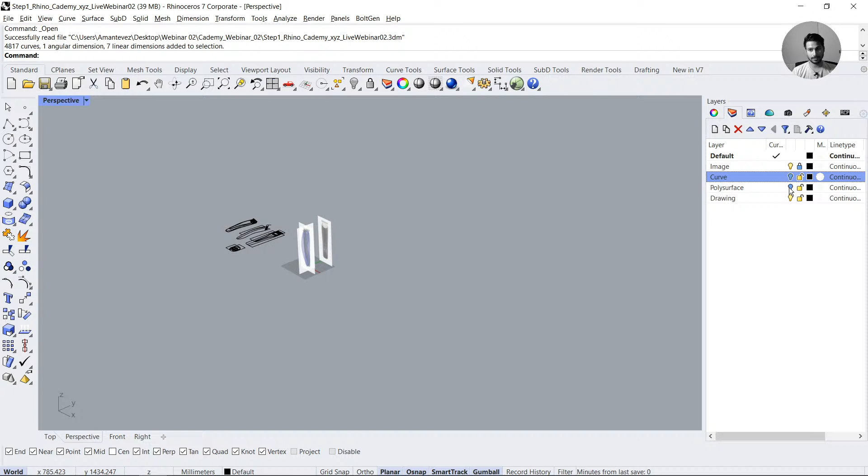So you will see that there is this generic technical drawing of the trimmer. And if you go to the perspective view, you will also see that I have set up the images so that we can trace the shape and create the geometry. You will also see that in the layers tab, I have added the different steps, so you still have the curves and all the steps that we will follow along, just for reference. But let's try to do it on our own without the help of the reference shapes, though we will sometimes turn it on and off to understand what is happening. So the first step is going to be creating the curve of the shape.

I'm going to go to the front viewport, and here you can see that we have the profile. So I'm going to create a new layer called trimmer profile, and you can double click to activate that layer.

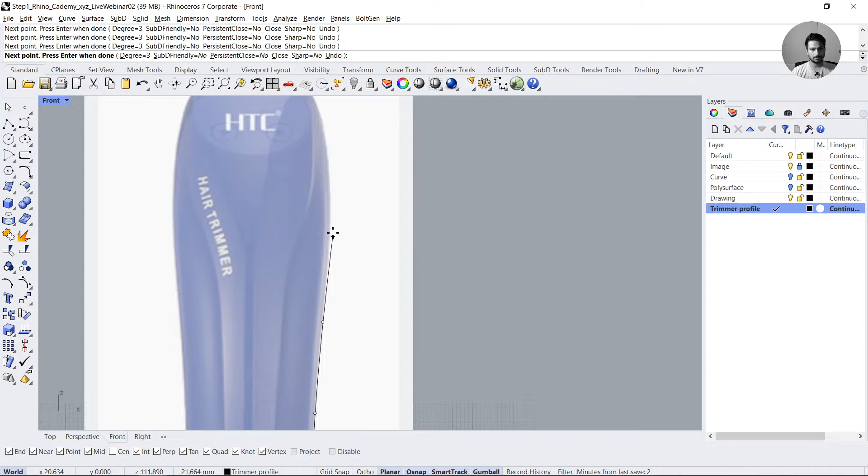So we will start to draw the profile using control points. Let's turn on this command. The degree is set to 3. So let's start by creating the first point in the center of Rhino. You can do that by pressing 0, and you can see that my initial point is snapped to 0, 0, 0 of Rhino. Just try to trace out the shape. Let's add more control points, and just try to extend the curve a bit away from the geometry. We only have to worry about this half, because the other half is just the symmetry of this half.

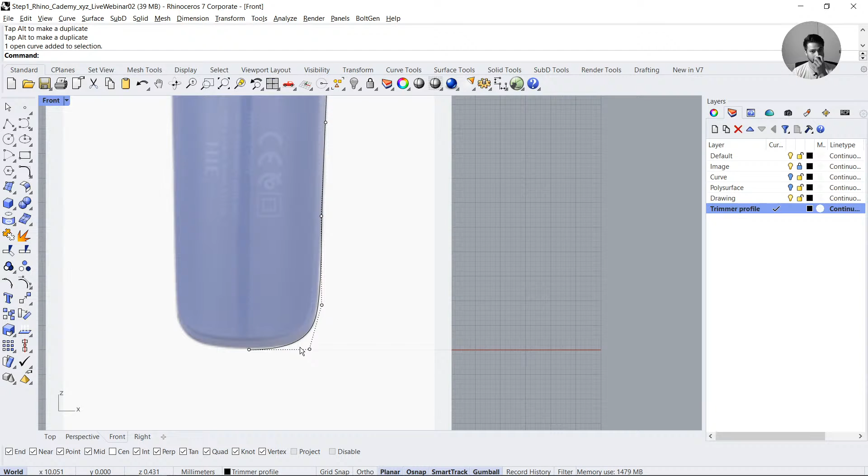Once you have the curves set up, we will now manually calibrate the curve. You can select the curve, turn on the control points, and then move these points in order to put the curve in appropriate positions. So we have a generic outline of the trimmer. We will see how positioning these points affects our geometry once we have created the other parts, but for now let's leave it like this. I hope you guys are following along so far. If you have any questions, just drop them in the chat and I can try to revisit your doubts here.

So once we have the curves set up from the front view, let's move to the right view. For the right view, just go to the right viewport, and now you just have to adapt this curve so that it follows the shape of the trimmer. I will not be touching the last two points, so I will just try to adapt the rest of the points to the shape of the trimmer.

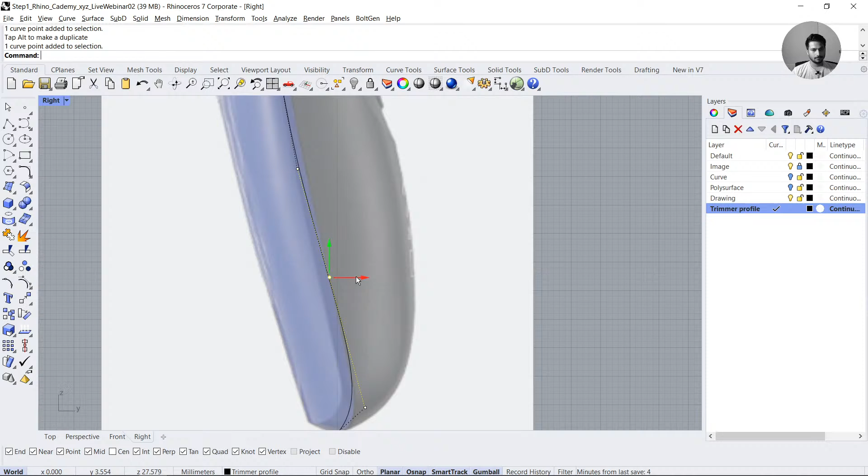When you're working with control points, everything is not so easily predictable, so generally I will position all the points more or less, and then slowly calibrate it. Let's move this control point, somewhere around there. And finally we have it. Again, if you're having difficulties, just try along with me.

If not, you always have the curve layer where you can extract the original curves. So once we have the side profile set up, from front view it looks exactly like that, and from the right view it follows the curvature of the trimmer.

Now we have to add the side two curves. Let's start with the front curve. Again, degree 3, start of the curve is 0, 0, 0 of Rhino, so I'm going to press 0 and enter. And then you can start to draw points. Let's add a couple of points here so that you can adapt to the curvature of this geometry. A good trick is that the fewer control points you use, the better it is.

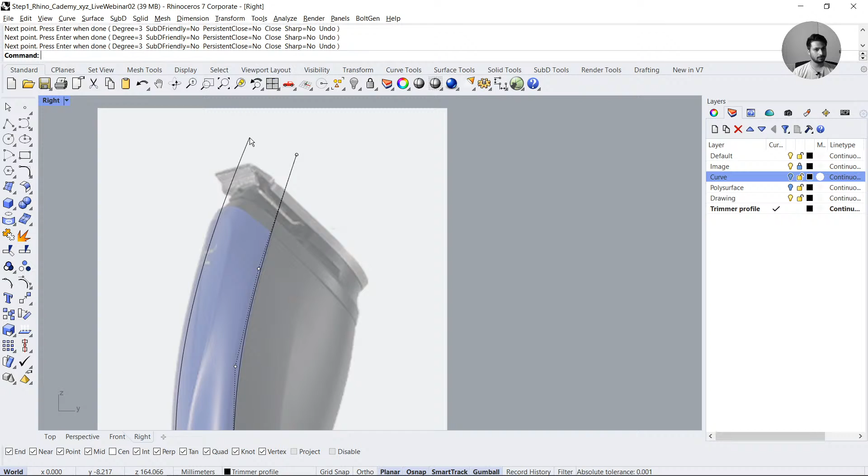In general, I'm trying to generalize it here, but the fewer control points, the less deformation you will have in the curve, and your curve will be a lot smoother. So every time, just try to calibrate the shape, more or less like that.

There are some tools in Rhino that you can use to see how the curve is taking shape. That tool is called Analyze Curve Curvature Graph. Select the curve, press OK, and you will see it draws a hairline structure where you can change the scale and density. This gives you a generic representation of your curvature acceleration and whether you've smoothed it out properly.

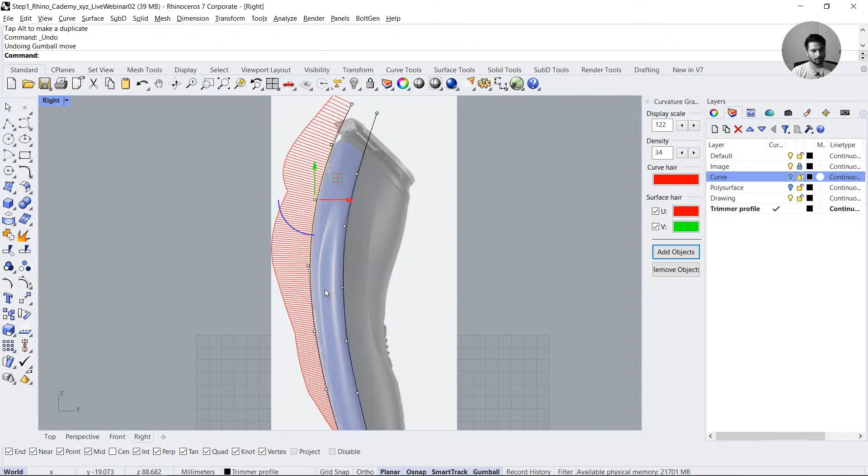You can see that when you move this... let me increase the scale so you can see the effect of the curvature exaggerated. You can move these control points to get a really even acceleration. Even if the curve looks pretty smooth, if you exaggerate the deformation using the curvature graph, you can see you have a lot of work to do here.

I'm just going to position these control points so that we never get a negative dip inside there. Just position it here. So that is more or less a good start.

Let's repeat the same process for the backside. Select the curve, start is 0.

The red lines affect the 3D model. Do the red lines affect the 3D model?

No, they don't. Fixate says it would be far less kinky if you built it with degree 5, degree 7, or degree 9. Yes, of course.

But we are going to just do it with degree 3 and draw NURBS curves. So again, 0, then start adding control points.

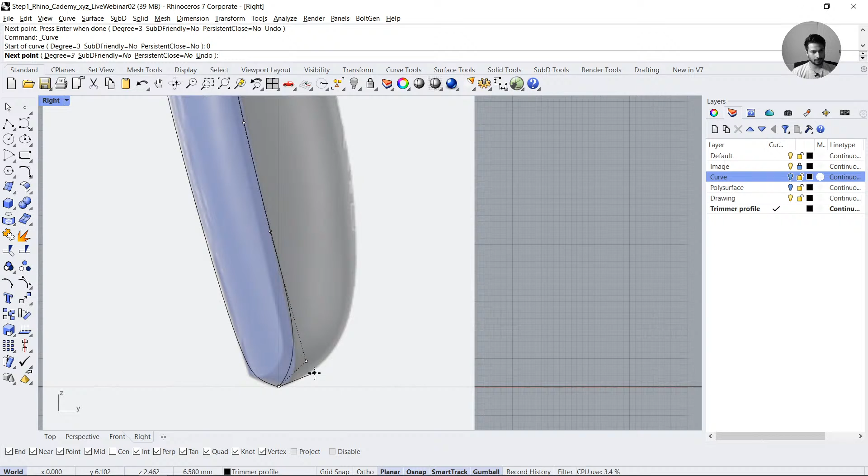Something like that. Again, like last time, try to move these control points so that you get the generic shape of the curve.

I hope everyone was able to follow along so far. Great.

Let's see how the curve looks in the perspective view. We have these two curves in the YZ plane, and the side curve is not exactly in a single plane because we have deformed it.

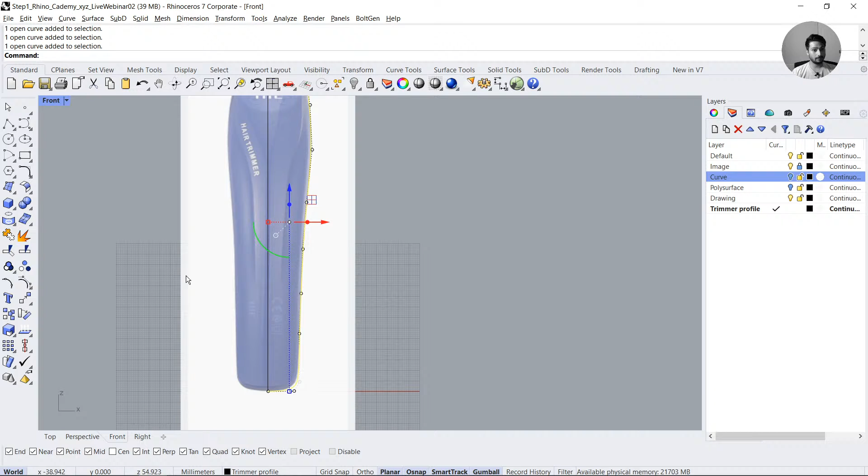Now the last step is creating a reflection of this curve on the other side. Turn on the mirror command, select the curve, and draw a line that starts in the center of Rhino. You can press 0, and with the shift key you can draw a plane that will reflect in the Y and Z plane of the Rhino viewport.

Something like that. Let me hide the image so you can see. Great.

Let me know if you have more questions. Fixate says that multi-span degree 3 curves don't have G3 continuity, of course, between the spans. Yes, they don't have the G3 continuity.

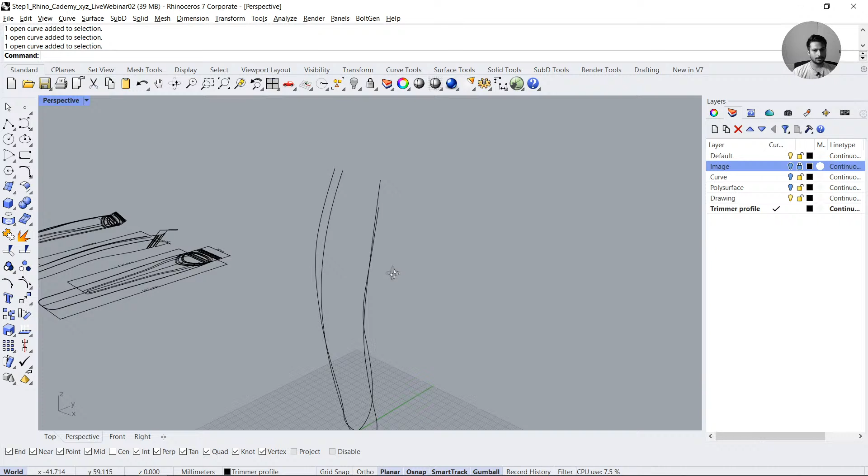So once you have these 4 curves, we are going to create the cross-sectional profiles, because now we will draw the curves that are in the V direction. These are the curves that are in the U direction; now we will draw the curves in the V direction.

Before I do that, let me turn back on the curve command, and let's get rid of the extra parts that we have. We can do it now or we can do it later — it's fine, it's the same.

You can either draw a curve, rotate it 45 degrees in the negative side, so negative 45, and position it somewhere around here. Then you can split these curves with this curve.

Both the curves, this curve. So we can get rid of these 2 points. It's going to create a problem with these 2 curves because they're not in the same plane.

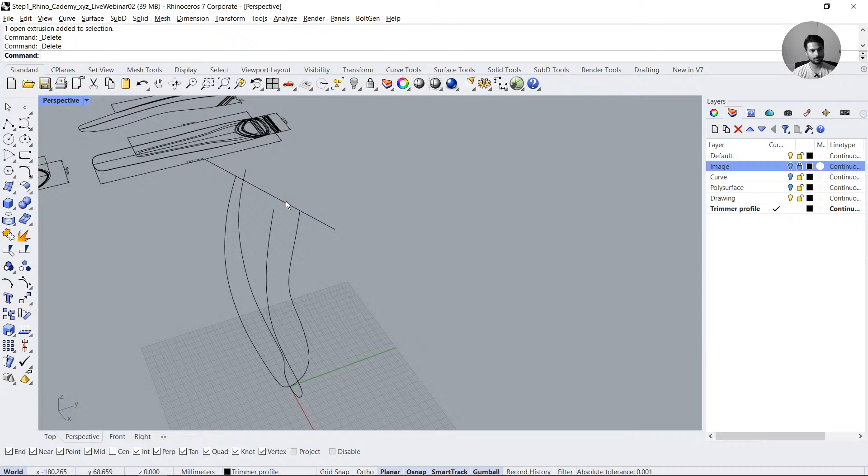So you can either extrude and then intersect. I have extruded that curve, and then I can split this and this with this surface so that you get rid of these extra additional curvature. Once you have set up till this part, let's create the V direction curves.

I will be using a command called curve from cross-section profiles. Basically here you select the curves in order: this is the first curve, second curve, third curve, and fourth. You can select either clockwise or counterclockwise.

Once you have done that, press enter, and make sure about two things. First, make sure that the cross-section profile it's going to generate is a closed profile — make it yes — and then you have to head to the right viewport.

Here you just have to start slicing the geometry using lines. Click, click, click, and then the last one like that. And you will notice that we have created these cross-sectional profiles.

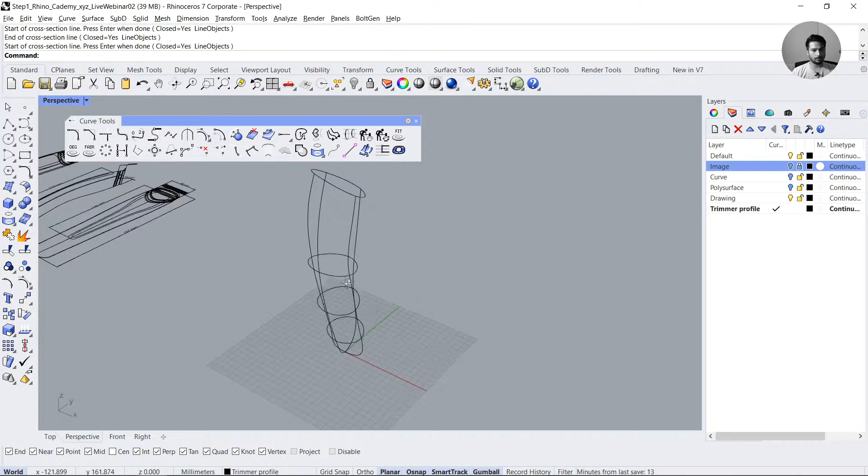Okay, so let me know in the comment section — do you have the geometry so far? Or do you want me to explain any part of it?

Probably there is a lag between what I'm saying and what you guys are seeing. But eventually, if you are lagging behind, Netik is asking how to trim the top part.

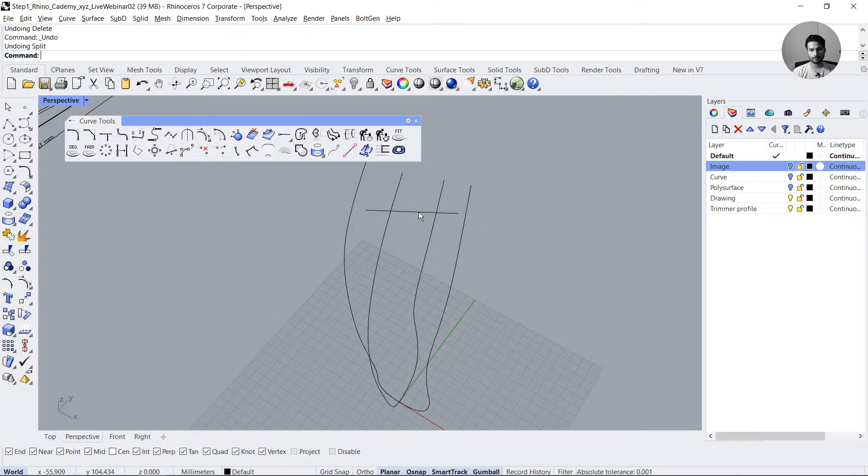The easiest way is to just draw a surface like this, using the same curve. Let me show you one more time. I'm going to extrude this curve straight in this direction, both sides. Create this surface, and you can use it to trim the extra part of the curve. Split these curves using this surface, and then you can delete these extra parts.

Then generate the cross-sectional profiles using this command, curve from cross-sectional profiles, one, two, three, four, and then go to the right viewport and start drawing the cross-sectional profiles. Like that. Awesome.

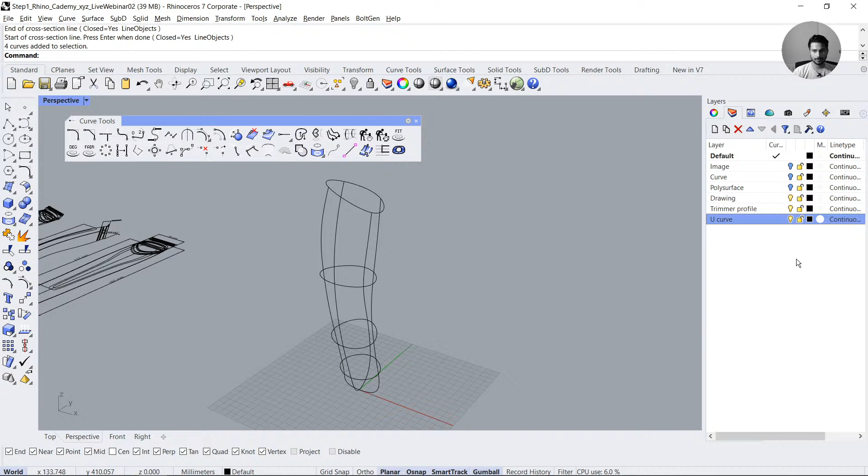The cross-sectional curve tool is pretty handy to generate these wireframes. On one side you have the U curves, let me call them U curves. And on the other side we have the V curves. You can call them interchangeably, it's fine, it's just that one is different than the other. Let me just rename.

Somehow it's not letting me have a command turned on. V curve. So let's select one set of curves, put them in the U layer, and color it red, and then the other set of curves, select them, and put them in the V layer, change the color, set to blue. So here you have the U and V curves.

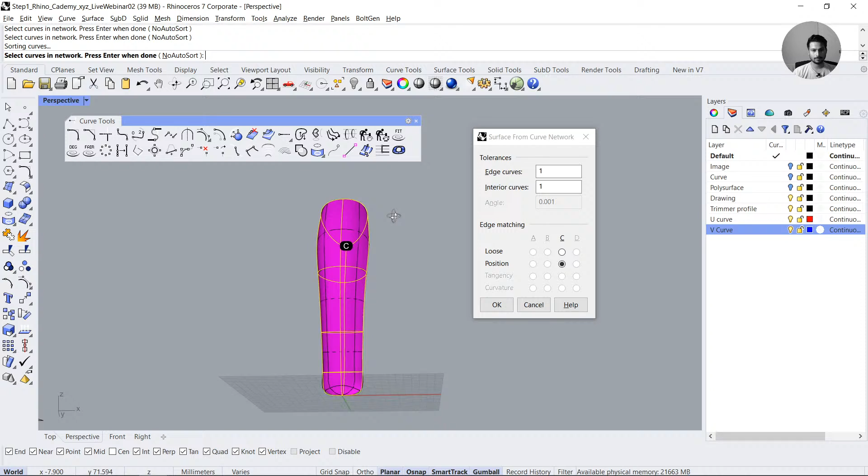And to generate this surface, we will be using a command called surface from curve network. This command will take your curves in the U direction, your curves in the V direction, and it will give you a surface at the output.

The only thing is this particular spot, you will see that there are some problems. If I just go to the rendered viewport, you will see that it doesn't look pretty clean. And that has to do with how we have resolved the continuity of this curve, from this curve to that curve, from this curve to this curve. So we have to clean that part. What I'll ask you to do is turn on the control points of all of these curves, and you will see that all the last points are in the same spot, so that's great.

However, we would like the next set of control points of each curve to all be in the same plane. So you select these set of control points, all the three plus this plus this, and we want all of them in the same plane. So you can either do it using this gumball, or you can use a command called set points.

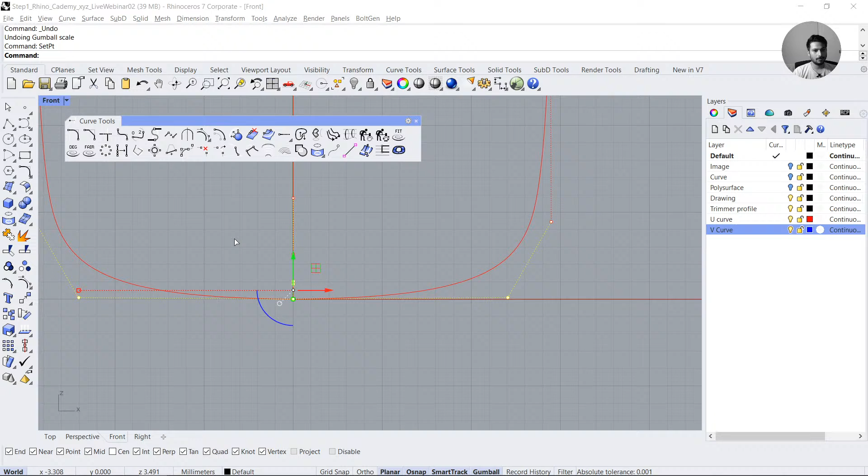The set points command will pop up this window that asks you which axis to set. In our case, we just want to set the points in the z-axis. You can see that I can move these points only in the z-axis. Press 0 and enter. This step will take all of these control points plus all of these starting points and put them in the same plane. This will help you create a surface that is at least tangentially continuous on this part.

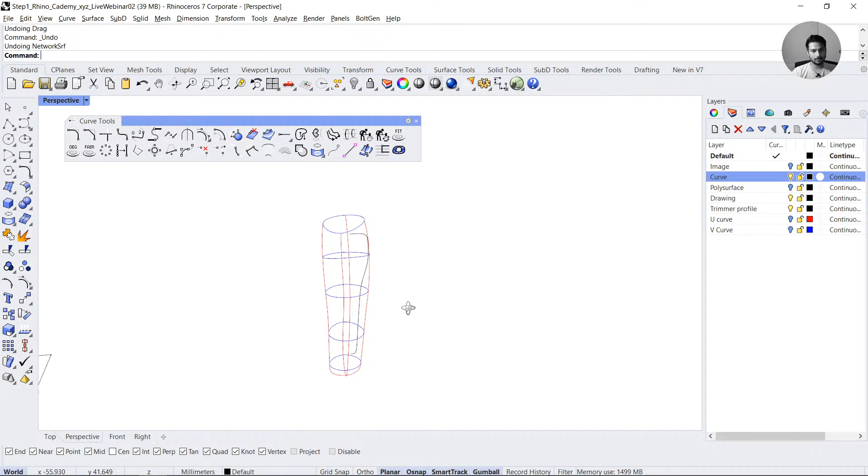So let me just flip it, and now you can see the rendered viewport. This looks a lot cleaner. We can still resolve some things, but it's a good start. What I can also do is hide these reference curves, and you can turn on the original curve if you're not able to follow along so far, and just rerun the command: surface from curve network, select everything except this line. I can select everything like that except this part.

And you should get this surface. Just make sure to set the tolerance to 1, because if you set a lower tolerance, Rhino will add additional subdivisions, and we don't want that. We just want a really smooth, simple surface as possible. The command that we use for creating the surface is called surface from curve network.

What I generally do is whenever I have a geometry, I will move it, let's say by 50 or 100 units. Then I'll do the operation I want, and move it again by 100 units. So each step you do, you're creating a backup copy of the geometry. This is going to save you so that if you mess up your file, you can go back to the previous step and resolve the problem.

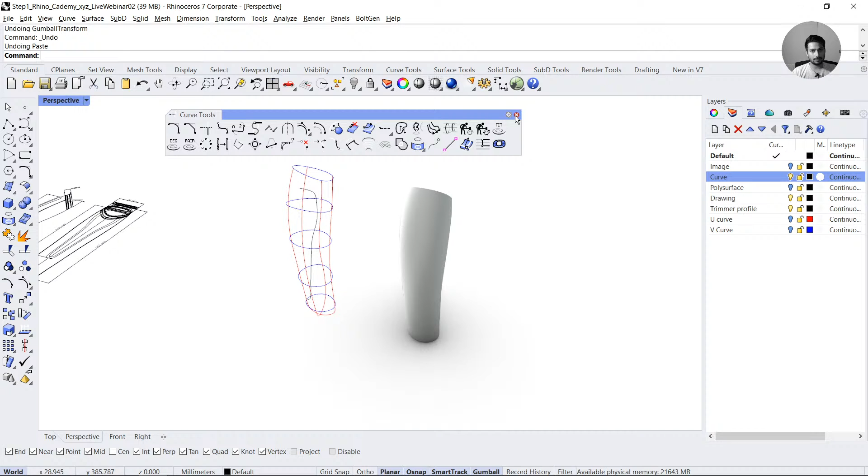Now it's just some simple steps to follow. You can turn on the poly surface layer to see the next steps we followed after this. The first step is creating these cut marks that we have here.

Turn on the image layer to see these additional geometries. I'm just going to create a curve that is straight, then rotate this curve by 45 degrees, and then create some additional copies of this using Control C, Control V. So I'll use these 4 curves.

To cut this shape into multiple small segments.

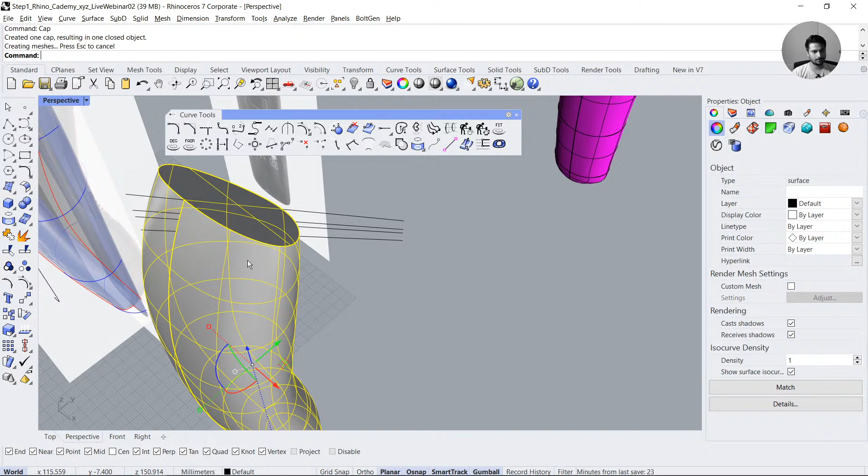Before I do that, I need to make sure this shape is a closed poly surface. You can do that by running the cap command. It will convert this open surface into a closed poly surface, because this hole is a planar hole.

Then we'll just use these lines as a way to cut or split this shape, so you can see here we have these individual shapes, once you have those individual shapes, like here.

And then we will also create this back and front side part. I don't need to explain these really simple steps, because these are just creating an additional plane, cutting or splitting the shape from front and back. You can split these 2 geometries, front and back, so you get the back and front geometries separated.

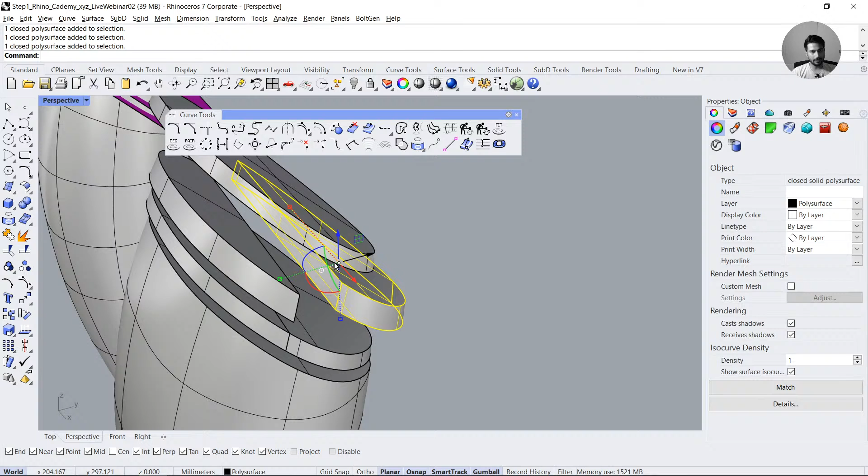Once you have them separated, I'll show you guys here, you can apply fillet. So the first thing, let me just move it by 5 units. This one has 5 - this step you don't need to follow along, just understand what I'm trying to do here.

You can add first solid fillet, and then add fillet over here, over here, and over here. So we added a fillet of 2 millimeters on each corner.

And then if you want to add fillet on this profile, let's repeat the command: solid, fillet edge, fillet, and make sure that this radius is lower than 2. We don't want too much radius, we just want to separate these 3 geometries visually, so I'll add a 0.5 millimeter radius.

You can also use chain edge to select the entire sequence of edges. If they're tangential, they will automatically be selected.

So Srikesh is asking - we have a couple of questions here. How do you get a surface with 2 colors, 1 on each side?

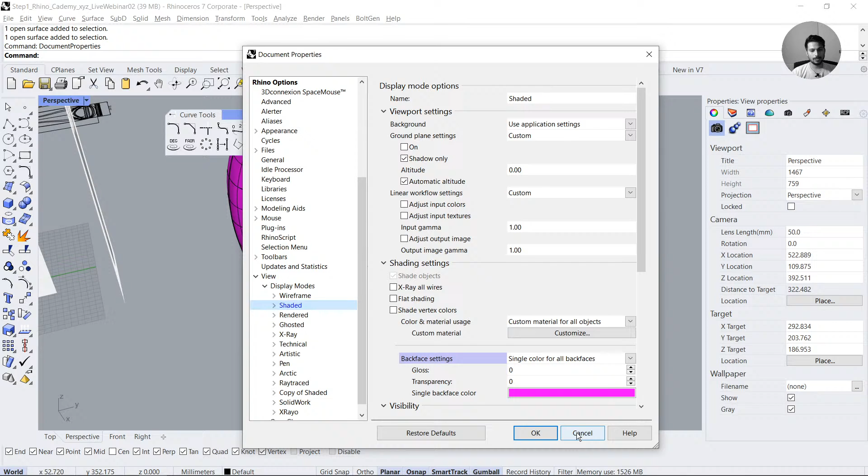This is something you'll be able to see in the shaded view. To change that, go to document properties, view, display modes, shaded, and change the shading settings to set the backface setting to a single color, so that you'll see all the backside of your surfaces in the same color. Display, shaded, backface setting, single color - set it to magenta or something like that.

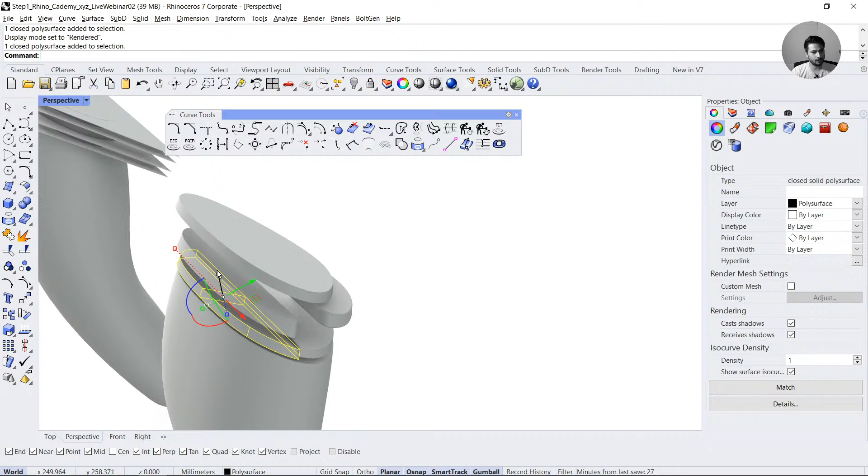And you will get eventually a result like this. So in order to apply the fillet, what I do is generally move these geometries by 1 or 2 units. This one was moved by 2 units, and this one also was moved by 2 units, because it's a lot easier to work when they're separated than when they're sharing the same edge.

It creates confusion, that is why you see them flying away, but they're strategically moved 2 or 3 units up or down. Once you have applied the fillet, you can bring them back to their original place. Now it's time to apply the blades. So basically you'll take this shape, move it up by, let's say, 10 units or 50 units in total.

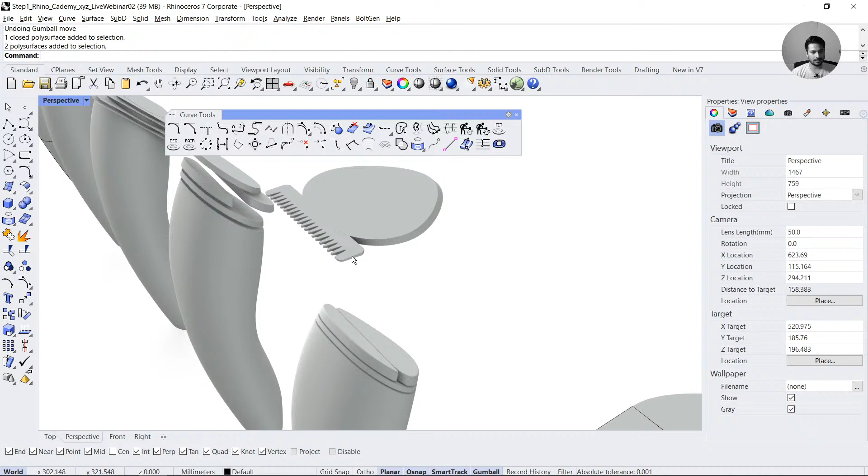So move it by 50, rotate it by 45 degrees to make it planar, because every shape of our geometry is inclined by 45 degrees. And then you can use this predefined shape and fuse it with your geometry. So you have this shape and this shape in almost the same plane, and I'll try to create a single shape with these two.

So I'm just going to move it away from my shape, it's easier to work like this. And just create a rectangle, something like that. And you can then extrude it, on both sides, and join everything together. If you have done it properly, you will be getting this geometry at the output.

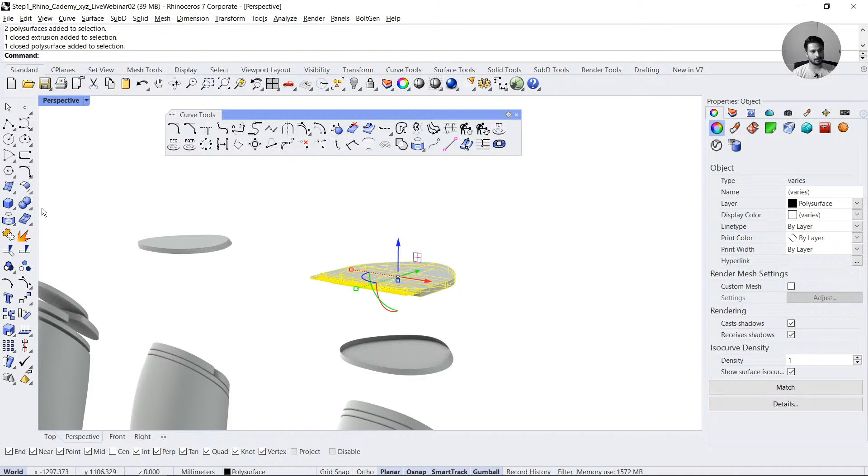So again, I have done this for you guys. You can see we have this shape, and you can select these 3 shapes together, and in order to combine them as a single solid, you can use Boolean union. And then I have just added a plane in between using the same curve.

You can use the same curve like here. I have created a surface like that, and then you can use this surface to split this geometry into 2 halves. So you can practice it by going to this part of the geometry, use the Boolean split command to split this shape into 2 shapes.

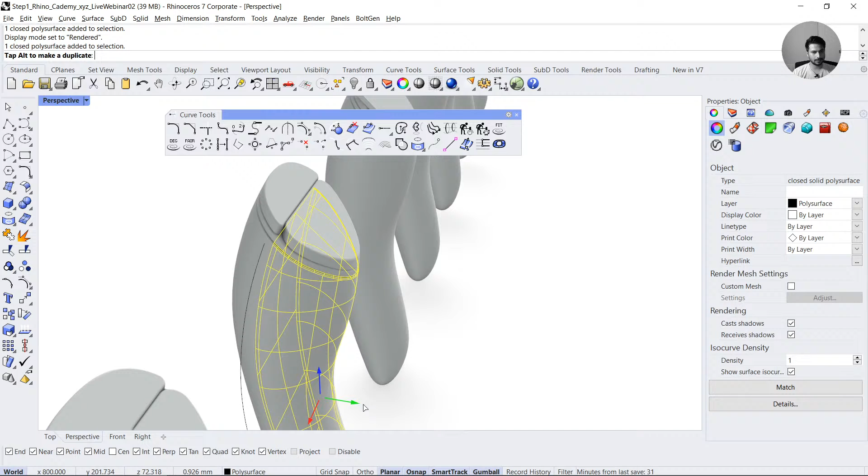All right, so that eventually you can get this half mark here on both sides. And yeah, you also need to apply the fillet, so don't forget to apply the fillet. Solid, fillet, and set a low radius.

So in this case, you can see it's giving me some problem because my radius amount is high. So let's go to solid, fillet edge, set the radius to something like 0.25. And there you go, the same here. So you can see that we have these 2 poly surfaces.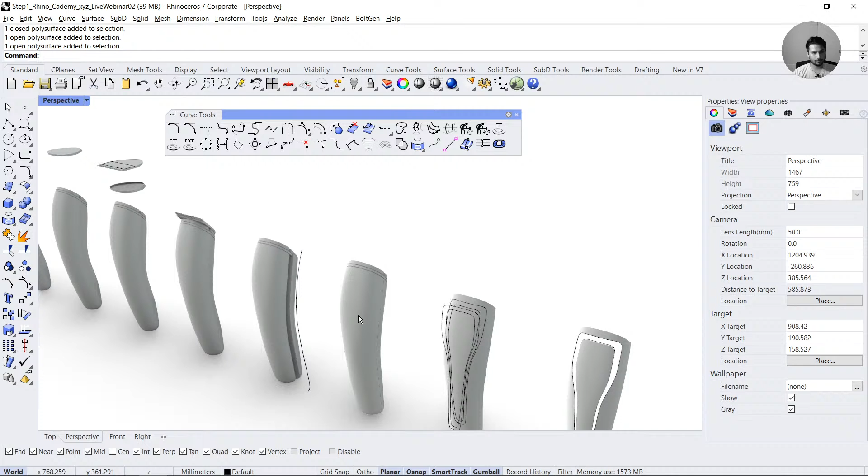Yeah, you can set the distance between the 3 parallel blades by moving them by 2 units, then 1.5, and then 2 units. Okay, so once you have this generic shape, of course in combination with the blade, now we have to add this lift in the shape.

So for that you can check this curve that we have drawn. So again, you can trace out this curve using the outline, and like last time, we are going to just lock the image. So like last time, you are going to make these points in the same plane so that you don't have any problem with continuity of the other half.

So you will use these curves to project it on the shape, like that. So I'm going to repeat it with you guys. Let's go to the front viewport, select the curve, create a copy, Control-C, Control-V, and then we will scale it down to create the transition. A bit more, something like that. So we have these two curves, right?

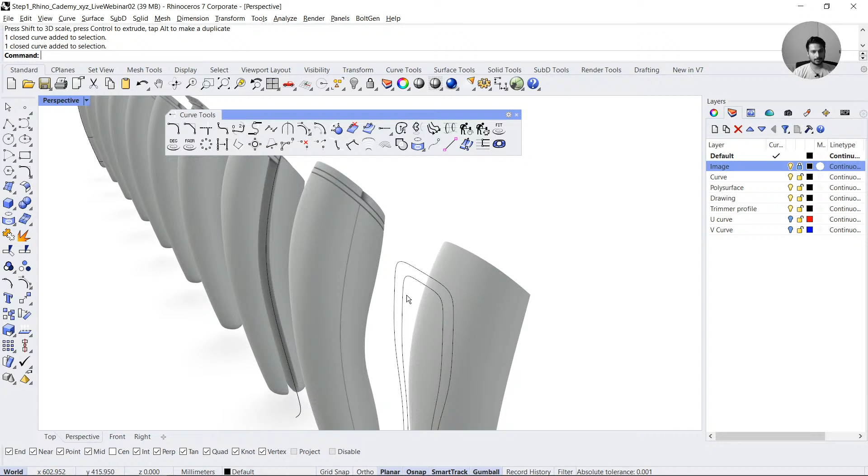And I will project these two curves on the geometry. So you can go to front viewport, project curve 1, curve 2, press OK, geometry, press OK, and you should have the curves projected. If you don't see the curves projected, just make sure that when you choose the direction, it is set to view, so that depending upon how you view the geometry, the projection will happen.

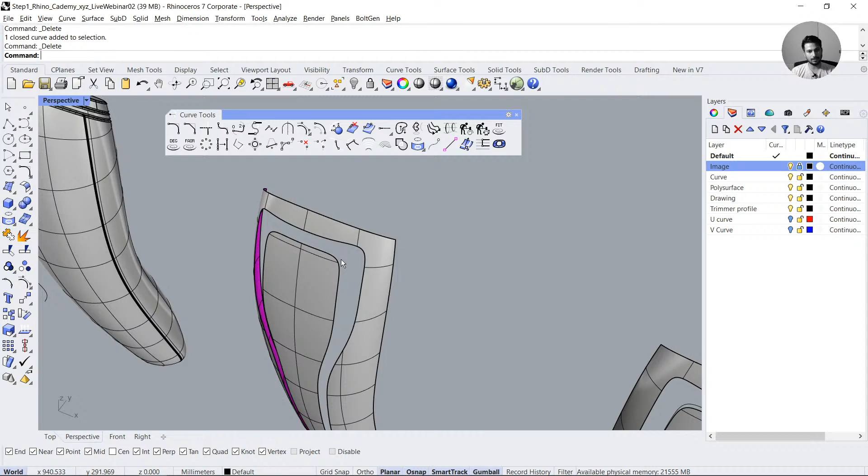So if you view it from the front viewport, the projection will be in this direction. If you view it from the side viewport, the projection will be in that direction. So once you have these two curves on top of the geometry, we can then split our surface with these two curves. So let's run the split command, select the surface, curve 1, curve 2, press OK, and then you can get rid of the intermediate part.

Okay, so you have this shape that we carved out from our original surface. We will just move this surface slightly outside, rotating it by maybe 1 or 2 degrees. That's more than enough. Then we will try to create the surface between these two geometries.

The easiest way to do this is using a command called blend surface. Select the curve, second curve, and then press OK, and it's going to pop up this window that will help you determine how this transition is happening.

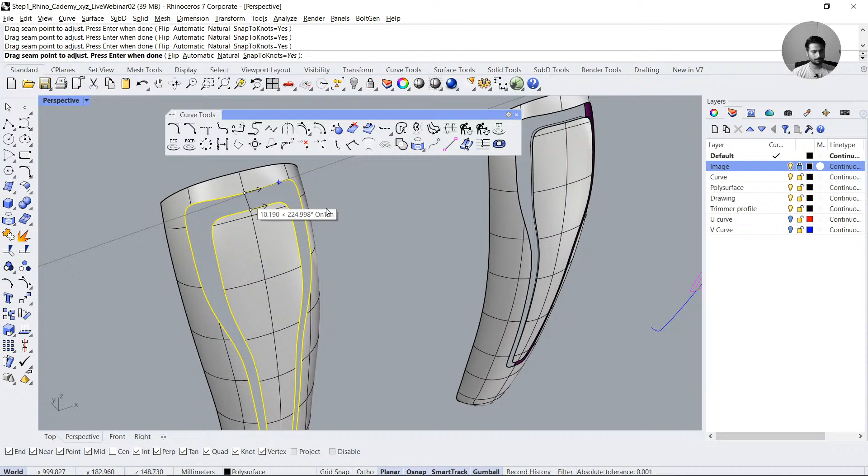To repeat, you use blend surface to blend this trimmed surface to this trimmed surface. Let's move this seam here, press OK, and then you can control these settings. These are more advanced controls, like how you want the continuity between your original surface and the target surface to be. You can fine-tune it depending on your needs.

You can also use this add shape command to add intermediate shapes. That can help you create a better transition between these two geometries. Once you're done, press OK, and there you have the transition shape.

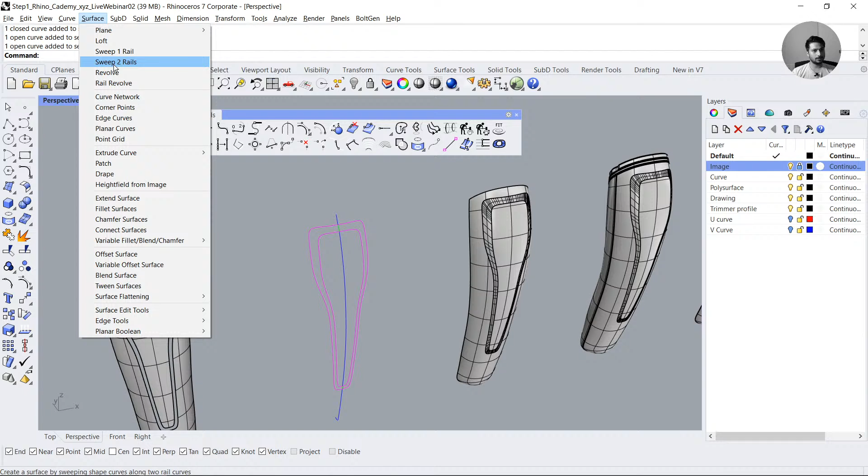I have also prepared a different way of doing it. I've created these two profiles, and then added these two curves. You can use another command called surface from sweep two rails, where you use this as one rail, this as another rail, and these two green curves as cross sections, and press OK. It's going to create this interesting surface.

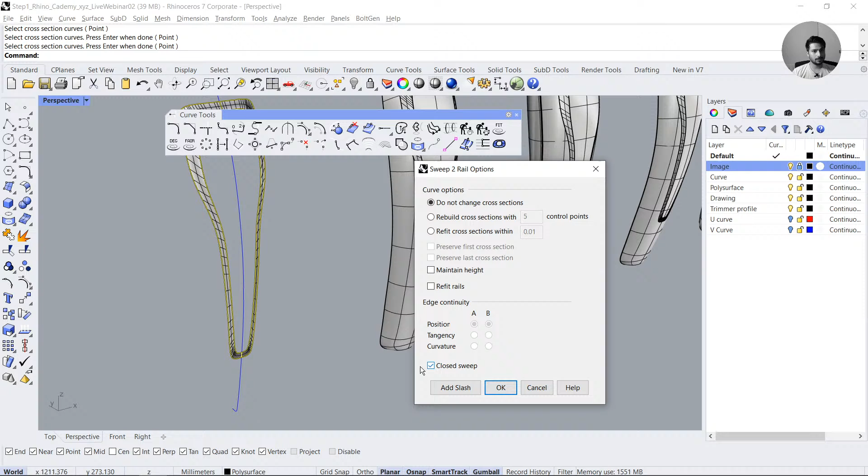Probably you can use this as well. I just need to select closed sweep to make it go all the way around. To repeat: surface sweep two rails, curve 1, curve 2, cross section 1, cross section 2. You get the shape. Just make sure to close the sweep. Press OK. So this is another way of doing it.

If you would have your surface here as well, you can also use the surface edge to match the continuity, but these are advanced techniques, so just try to follow along as far as you can. You can investigate more about these continuity operations later on. Finally, you'll have a geometry that looks like this, which you can join with the rest of your shape.

Now let's see what else we can do here. Let me check if we have more questions. Srikesh is asking whether the design rule is that subsequent fillets have to be smaller than the previous one.

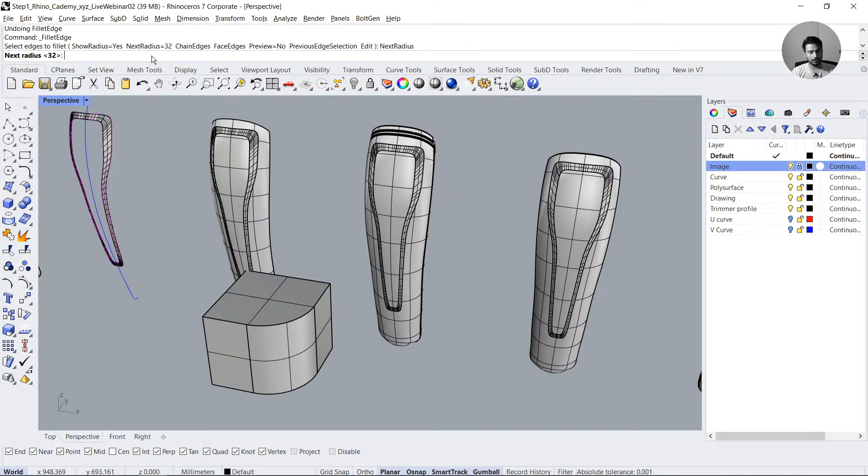Yes, exactly. So if you have a cube and you do a solid fillet of maybe 30 units, now if I have to fillet this particular edge with solid fillet edge, if I set it to anything that is 30 or above, let's say 32, it's going to give me a problem, as you can see. But if it's smaller than 30, even 29.9, it's going to work.

Surfaces need for the fillet, the corner fillet, need 4 sides, as you can see. So by leaving this really small edge, you're actually giving it the 4th side, so it kind of works.

Now let's apply some kind of texture to this particular face. I'm going to open Grasshopper. You can click on this button, or write the Grasshopper command, and it's going to open this pop-up window.

You can just dock it to the right side. If you're barely starting with Grasshopper, it's going to be a bit difficult to follow along, but we do have more webinars on our channel you can watch, and we'll be uploading more stuff so you can follow along.

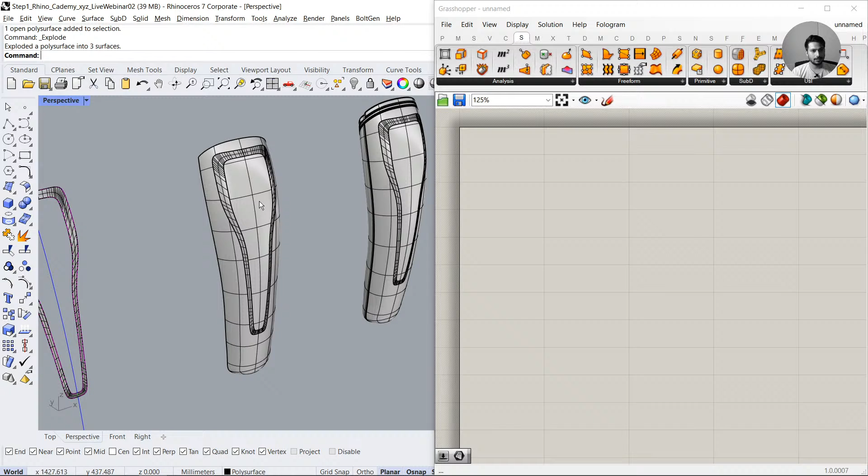So we will be applying texture to this particular face. I'm just going to deconstruct the face on polysurface so I just have this particular face with me. You can even get rid of these by moving them away. So I'm going to import this surface into Grasshopper.

Let's add a surface node. You can double click and write surface and find the node that looks like this. This can import surface from the Rhino viewport. To do that, you right click, set one surface, and reference this surface. You can see it looks like this red color object, because you have your original surface overlapping the Grasshopper geometry. So you can either hide it, or hide the viewport here.

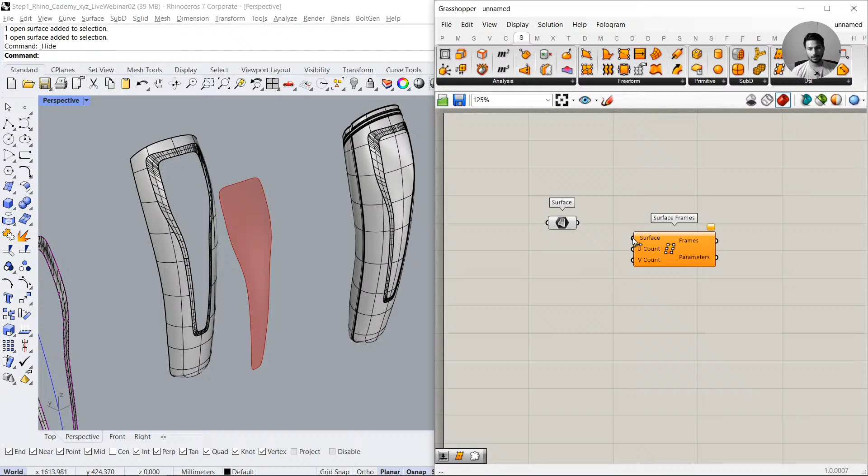We are going to apply some kind of texture to this shape. For that, we will be using a component called surface frames, which will help you generate frames on a surface. Let's go to surface, utilities, surface frames, and when you connect the surface here, you can draw this cable.

You will see that it has created some number of frames on top of the surface. If you don't see these frames, or if you see these frames really big, you can change the display of these frames by some amount. You can make it bigger or you can make it smaller.

You can also add counts. So double click, and let's say you add 25 counts in the V direction, and maybe 60 counts in the U direction. Okay, maybe that is too much. Something like this.

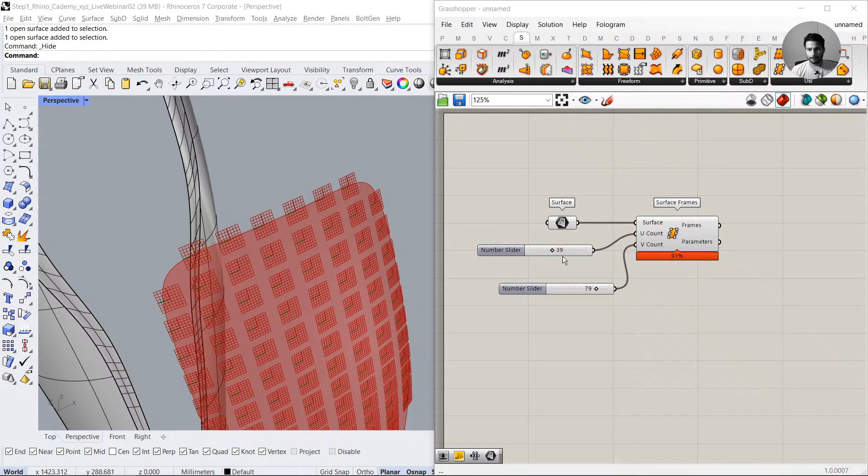So what are frames? If you look closely at any of the frames, it's basically like a C-plane. You have the X and Y axis, and also the normal direction. If you add a panel to the frame output, you will see that whatever geometry you get here has an origin, which is like the physical coordinate in 3D space, and then a normal axis, a normal vector for that particular point. It's a bit complex, so just think of it as creating placeholders on top of the surface that are oriented normal to the surface. You can see that the frames at the bottom are aligned to the surface at the bottom, and on the top they are oriented in a different direction.

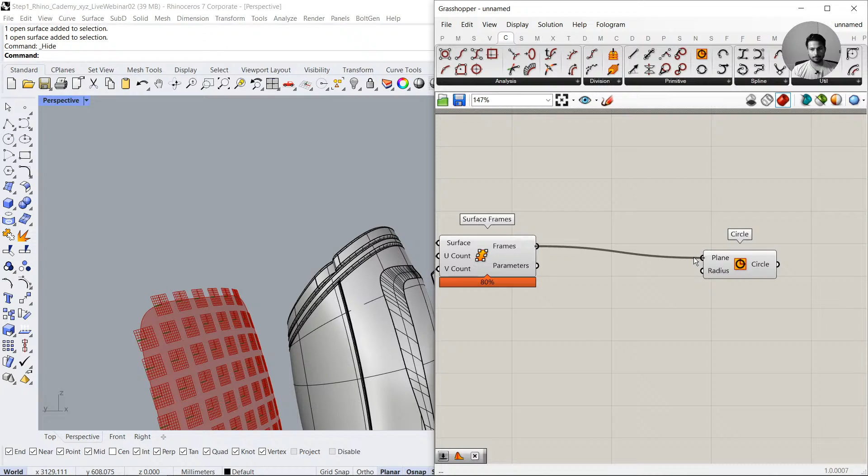We can use these frames to put any geometry on top of them. So let's create circles on top of those frames. You can find the circle component in Curve, Primitive, and the circle component is here. So we will create these circles on those frames, and you can see we have added the circles here.

A couple of things to do. The first thing is we need to hide the frames because we don't need to see them. To hide a node in Grasshopper, you select the node, press the middle mouse button, and you hide it. So you're not seeing the frame, but it's still working, it's giving output.

The other thing we will do is deal with this cable, which is a complex data tree flowing through. We actually don't want it, so we have to do an operation called flatten. Flattening the tree will change the data structure from something complex to something simple. If I show it to you graphically, before it was looking like this, and once you flatten it, it looks like this. We are basically putting all the frames in the same simple list.

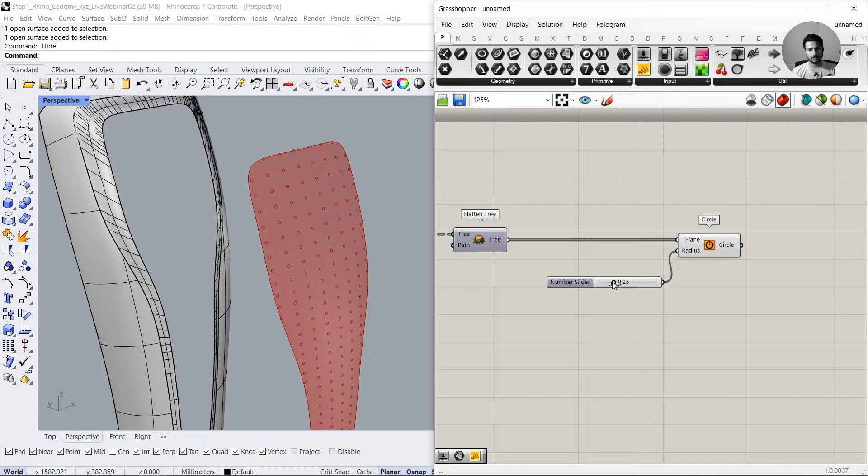Once we flatten it, we just want a flattened list where we are creating the circles. You can use the radius value, let's say 0.25, to control the radius of all of these circles. And as this is a parametric model, you can go back anytime to the surface frame U and V count, and increase it if you want more or fewer circles.

I hope till this part things are clear. Let me know if you have any questions.

Great, so we are almost there with Grasshopper. The last step is the following: you will see that some of our circles are touching the edge corner. So when I'm trying to fuse this surface back to my original geometry, if I have any kind of operation on the edge, it's going to give me a lot of problems. So what I need to do is create a system in Grasshopper that is able to filter out all the curves, points, or frames that are close to the edge of this surface. Let's see how we can do that.

First, we need to extract the edge of the surface. You can use a command called Brep Edges. You can go to Surface, Analysis, and you have the Brep Edges component there. You can see that it extracted my surface edge here.

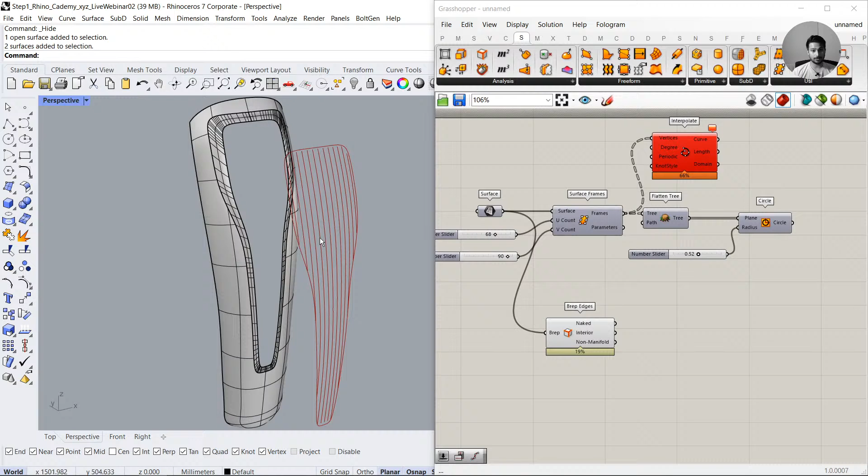But you can see that you get these vertical lines, and if you want horizontal lines, you can flip the matrix. These are some advanced operations, so I'm just showing you the flexibility of Grasshopper. But maybe they're not aligned the way I thought they would be, that's why it's creating this weird structure, but for a straight line it works. It's not gonna work for the other side because you have different amounts in the lists.

Anyway, so we have the curve here, and we need to compare whether this point, this frame, is close to that edge.

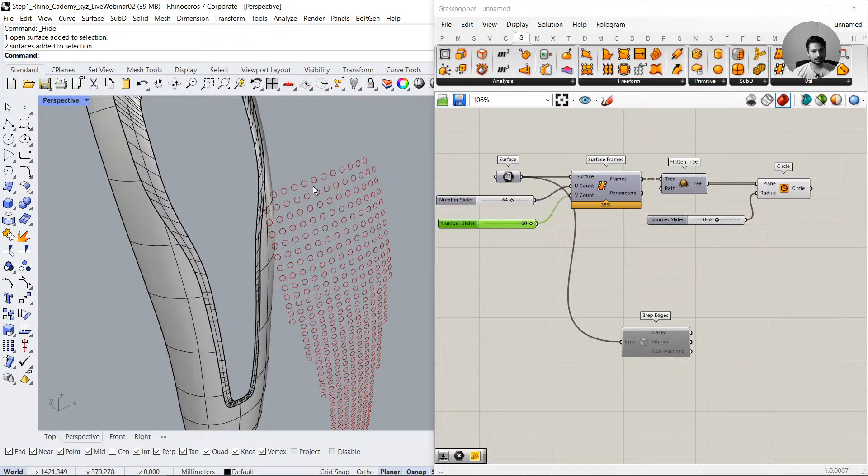Can you control and change the spacing between the frame circles? Yes, of course. You can see here that if I change the count in the U direction, you can make it less spacious in this direction and in the other direction as well. So you can change the space. You can also create a parametric way of doing it, but for now we're just trying to do it fast, and you can manually calibrate it.

All right, so once you have the cable, the edge, let's compare. Let's add a point container. Let's compare. Just make sure that you never take anything from the frame part, you always take it from the flattened part.

Can we put the circles along the surface edge? Yes, we can do it, but let's first do this and then I can explain how to do that as well.

So let's compare these points to these curves. There is a command called pull point. This component can pull these points to this curve. When it pulls any of the points to the curve, it calculates the distance it had to travel to pull the point. So that's a good value that we have, and now we can compare the distance of each point.

So if in any case the distance is low enough, we can get rid of those points. Let's see. So first you get the distance, then let's compare whether a distance is lower or larger than a certain amount. You can use an operation in mathematics called larger than or smaller than.

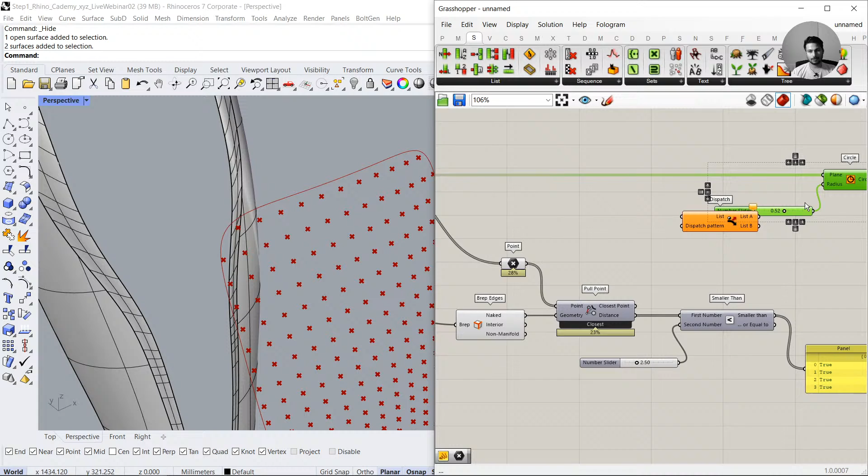So what is it that we would like to dispatch? We would like to dispatch the circles. Well, I think it's better if we dispatch the frames actually, because it's gonna be a lot more helpful, so I'm gonna dispatch the frames. Let me just show you in this way.

So I'm going to dispatch the frames using this pattern, and you won't see any difference yet because you're seeing both the planes here. So you just need to add a plane container, so you can see all the planes that are close and all the planes that are far away, and hide this component. Now you can see each plane that was close enough was eliminated from the list. Let's hide everything else, and then we can create a circle on those planes.

And then you can use this value to calibrate whether you want these circles or not by changing this value.

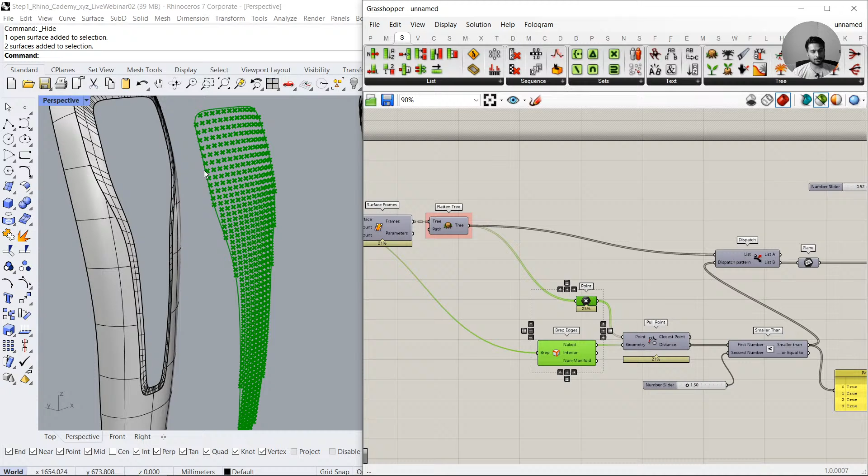I know it might be a bit confusing, but I'll repeat. We start with the surface, we draw frames. We flatten the list because we don't want to work with a data tree yet. We take the surface and extract its edge. We compare these frames or points to the edge of the surface, and based upon the distance, we filter those frames into one list and the other list. On that frame, we draw the circles, so we can change or control how many circles we want in our list.

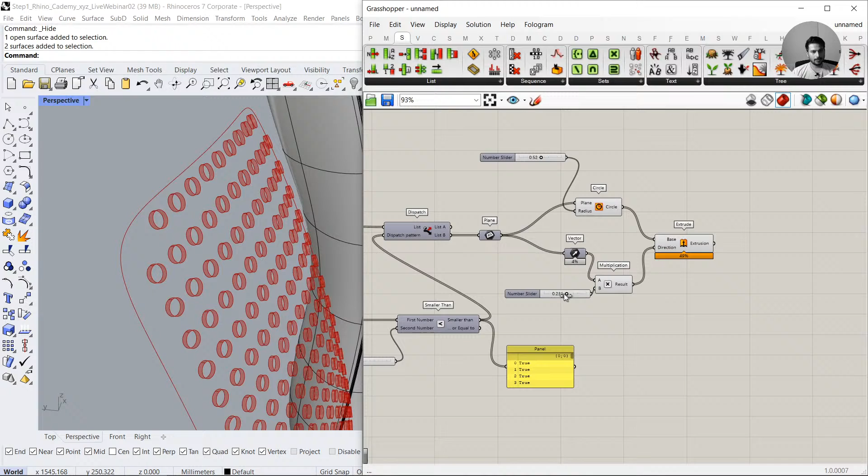And finally, you can use the cap command to convert these circles into solid geometries. So I will start by reducing the number. Always try it with a low number of geometries, and once you see it works, you can then bump up the count.

We have at the output closed breps. So I'm just going to increase the numbers, 70 in this direction, 100 in this. And you can see it works perfectly.

All right, so once you have these geometries, in order to bring them to Rhino, you have to bake them. So to bake a Grasshopper geometry, because it doesn't exist in Rhino, as you can see, I cannot select it.

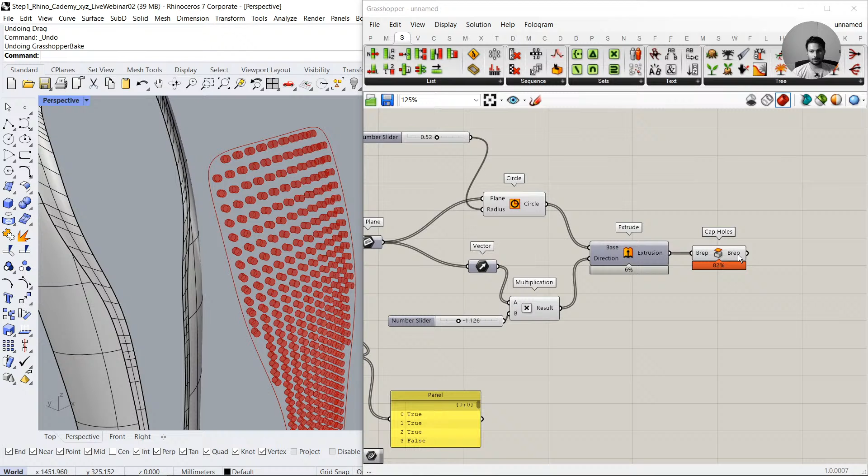You need to right click and then bake that geometry. It's going to ask you in which layer you would like it to bake, as well as would you like it to group together. So I'm going to say yes, I would like to group it together. Press OK. And there we go.

We have this geometry that we can use to remove from our closed shape. So if we have it over here, as you can see, just going to move it slightly in this way. I can use this shape to remove it from my base solid geometry.

Just going to give you a really fast demo. So let's just ungroup it so that we can do it one by one in small batches.

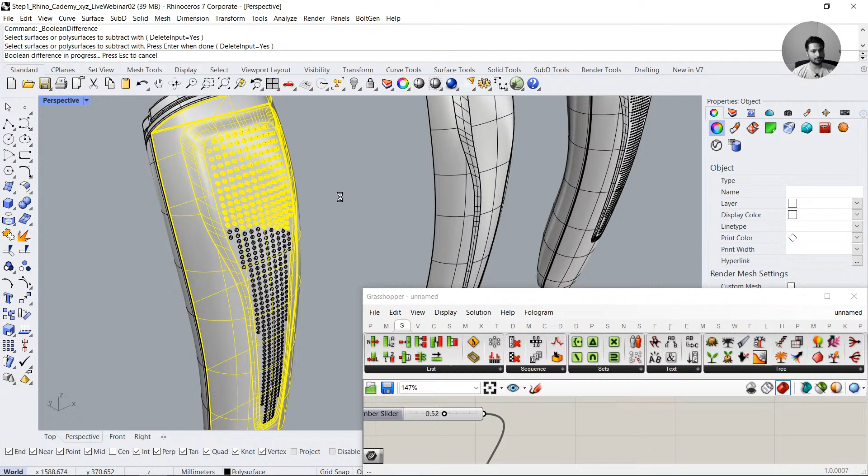So it's calculating, it's a complex task. As you can see, it takes a while to do it. But meanwhile that I'm calculating this, you can ask me any question in the chat.

Some of you are asking, I used to measure the distance by extracting a point from a curve and then using the distance between point command. The pull point command is incredible. Yes, the pull point command also, the other thing about it is that you can use multiple geometries, not just one. You can put as many geometries as you want, and it will filter without any problem.

Then Carlos is asking, hi, the percentage shown on the bottom of the function, what does that represent exactly, and how can you display that? As you can see, some of my components show this percentage. The percentage is actually how much resource this component is taking in the entire definition. So the last component is taking almost 80% of the computational resource, or if you double click, you can see how much time it takes. You can turn this on by going to Display, Canvas Widget, and turning on the Profiler.

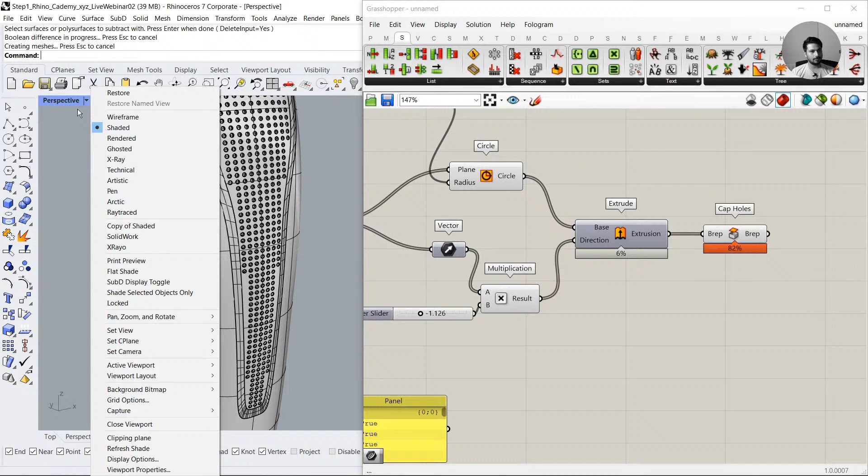So as you can see, I'm slowly removing these shapes from the geometry. Okay, one last step. And you have the final geometry, as you can see here.

Now we have this texture applied. Okay, someone is asking...

Can we define two sizes and make Grasshopper create a fade in and out based on those two circles? Yeah, you can do that. You can first directly do this without using two circles. I mean, you can just create a gradient of radius. So instead of a fixed radius like here, we can use as many numbers of radius as there are planes.

So I'll just show you, you don't need to follow along for this part. I'm going to filter the, let's say, the distance as well using the same pattern, and in list B I have a number of values. So the list is a number, and I can use this number to calculate the radius. Just let me make it a bit smaller.

Again, you can see here how I am able to control the radius based upon the distance. If the circle is closer to the border, the radius is smaller, and if it's closer to the center, the radius is higher.

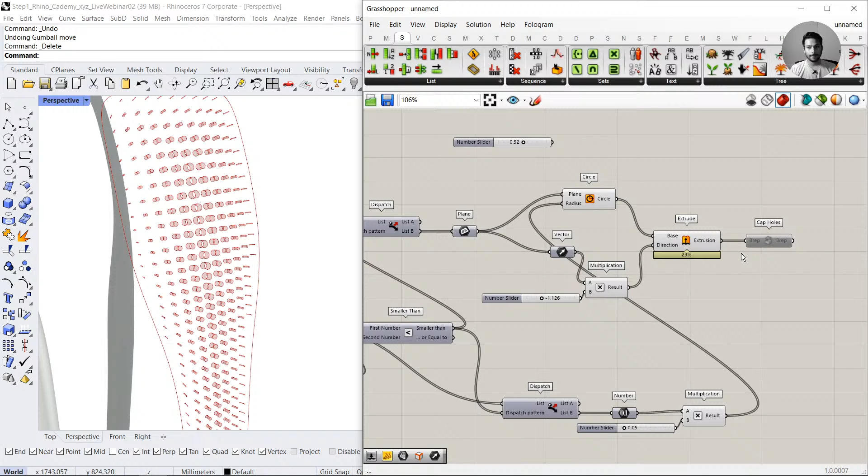All right, so once you have that shape, you can use the last one that I have already prepared for you guys. In this case, I have used a different shape. You can check the Grasshopper file that I have attached to see how I created this shape. Then we will save this geometry to render in KeyShot.

So we created the geometry in Rhino, and we applied the texture in Grasshopper.

Once we are finished, let's export this for KeyShot. Just select all the shape using this rectangle, go to files, export selected, and then create the file format. I have seen that KeyShot is giving some problem with Rhino 7, so you can use Rhino 6 and just rename it.

You will see that we have exported just that geometry only. Now I have set it up for you guys, so you can just open the 3DM file directly. Let's open it with KeyShot 10.

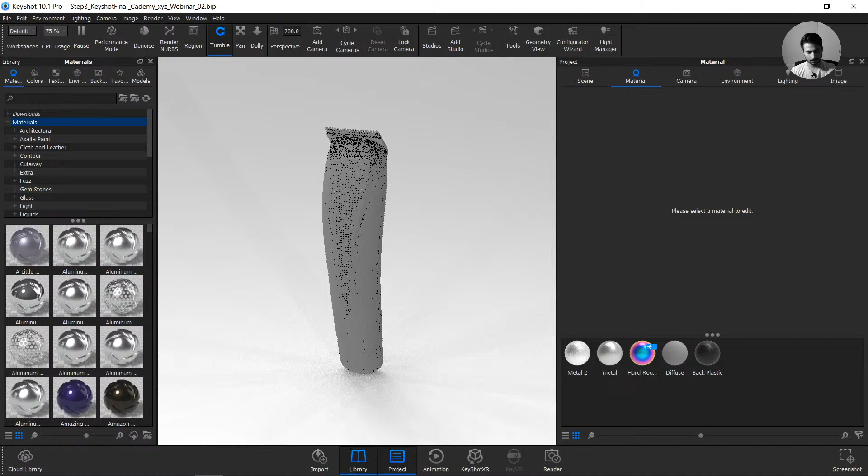Which format to export, Natik asks. You have to export it in 3DM Rhino file. You don't need to convert it into any other format. KeyShot can understand native Rhino files. It's just that Rhino 7 sometimes gives some problem. Rhino 6 is what works perfectly in my case. Probably this has to do with my KeyShot version.

Great, so let's open this, and when you open the KeyShot file, you will see this trimmer. It has this really diffuse material. Let's see how you can render this geometry in KeyShot.

Is there any option for patterning the blades? Are you talking about creating the blade pattern in Grasshopper? Because it's a pretty simple shape, like you draw the shape and you can copy it multiple times to create the Boolean difference.

If you are starting with Rhino, I will recommend you guys watch our previous webinar, you can check it in the channel, where we create some simpler shapes first.

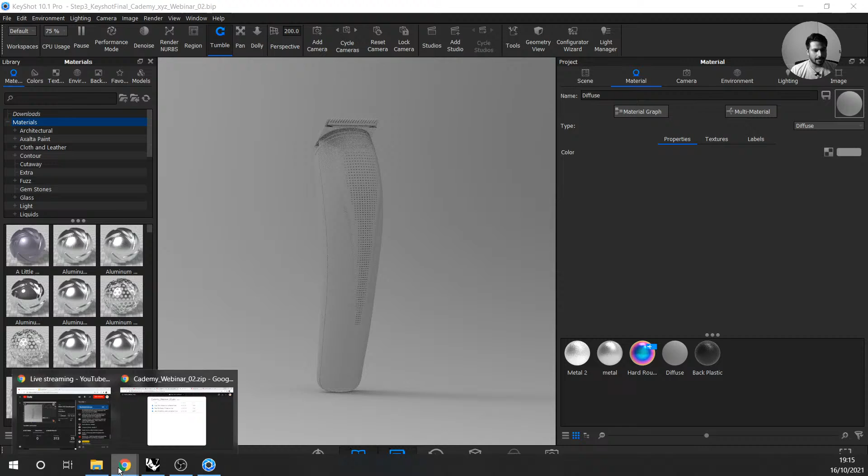HDRI. So you can also check our webpage in the resource tab. We have an article where you can learn how to create this HDRI. I'll explain step by step how you can go from something that looks like this to something that looks like this by creating your own studio in KeyShot.

So first thing first, I will be applying a plastic material. Let's go to plastic, find this hard rough plastic white, and apply it to the entire shape. You can just drag and drop like that and it should work.

You can also go to the scene tab and drag and drop the material here. You can see the difference, hard plastic white.

Netik is asking, did you use the import command in KeyShot or drag and drop the 3DM file? Well, in this case, you will find a KeyShot file. We have just opened the KeyShot file, but the step is exactly the same. You just go file, import, and import the Rhino file directly, and it should pop up.

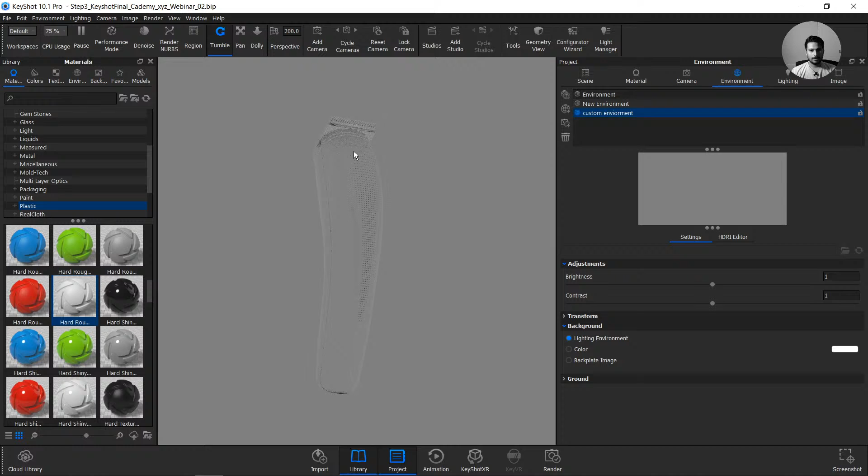You can see that at the moment our environment has this gray color image surrounding the geometry. So first thing first, we will change the environment by going to the HDRI editor. Make sure you're at the HDRI editor and not in the settings tab. Here let's first bring down the color of the background to black. In the HDRI editor, background color is black.

Once you have done that, let's start to add lights in our HDRI. To do that, you just click on this button that is add a pin light, and you will see that a light has been added to the viewport. You can see it from the distance, and you can move this light source in 3D space, and depending upon where you put it, you will see different parts of your trimmer being lit.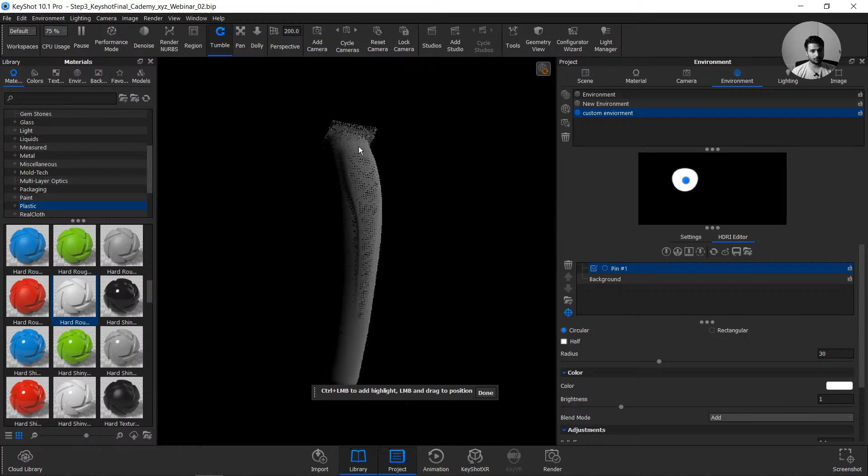You can press this button here to set the highlights, done, or you can click this button, and now wherever you click on your screen, the point light will put itself perpendicular to the place where you have clicked, and it will set a highlight in that particular spot. So you don't need to manually change it here. You can just click on the shape and it will automatically put itself normal to that part.

Okay, so we just have to start with adding multiple light sources. I have added the first light source somewhere around here. So that is our maybe key light, the principal light.

Let's add some more light sources. I'll add one more over here. That kind of lights up the shape from the backside, and it kind of defines the volume of the geometry.

And if you don't want it to be too bright, you can always go in the radius and brightness tab to turn down the brightness of that particular light source, or you can reduce the radius.

I hope you're following along so far. As you can see, we already are getting some decent composition here. You can keep on adding more light sources, maybe one that points it from the bottom side, or maybe something that lights up this particular spot.

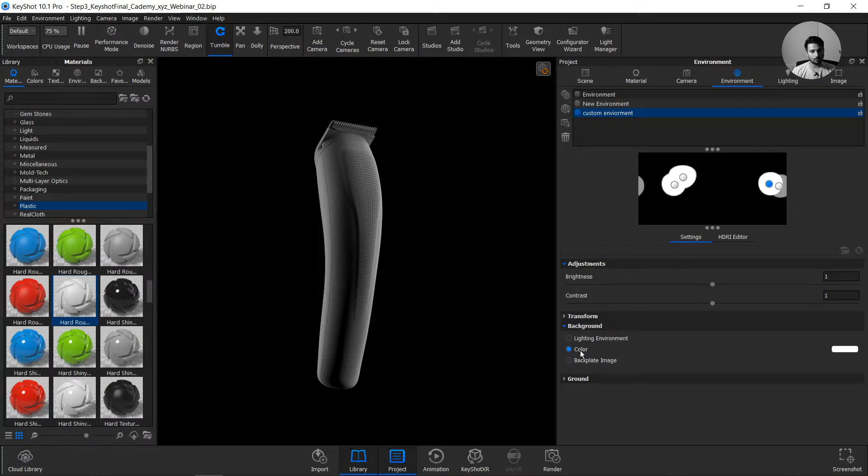Once you're happy with the lighting settings, you can come back to the settings tab and change the background lighting. Instead of the lighting environment, you can change it to a color, so you can set a permanent color as your background. I'm just setting it to something like grayish in color.

And then let's save this particular camera, the camera that you like. If you want, you can use one of the cameras that I have already set up for you guys, this is the last camera that you can use. Or you can just set up any camera you want and press this plus icon to save it as your own camera.

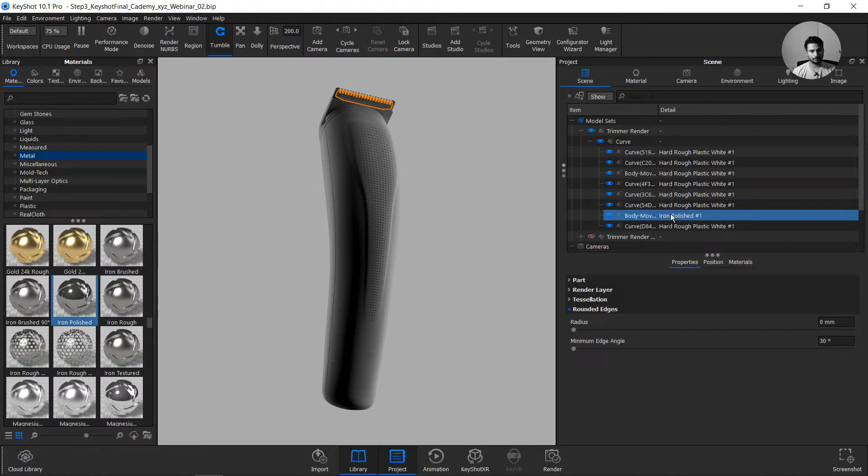Great. And finally, let's apply some materials to the geometry. First thing first, we will apply a metallic material to the blades. Let's go to metal, let's apply iron metal, iron polished. I'm going to drag and drop it over here. You can see we have applied the metallic material to that part.

So I will select all the parts where I would like to apply the metallic material, which is this part as well. There you go.

And then let's apply two different materials to these two parts. The back part I will apply a plastic material, so you can go to plastic, hard rough plastic, the black color, and let's apply this over here. Again, you can see we have this nice black plastic in that part.

And for the front part, let's apply some shiny red plastic, this one, like that. And you can see if you like the results or not.

So once you have applied the material, I generally recommend you to go back to your HDRI and do some minor tweaking, because you can see everything looks a bit dark, so you might want to increase the brightness of some of your light sources. I'm gonna make it twice as bright, this one also maybe a bit brighter, this one also maybe twice as bright. And you can see how does it look now.

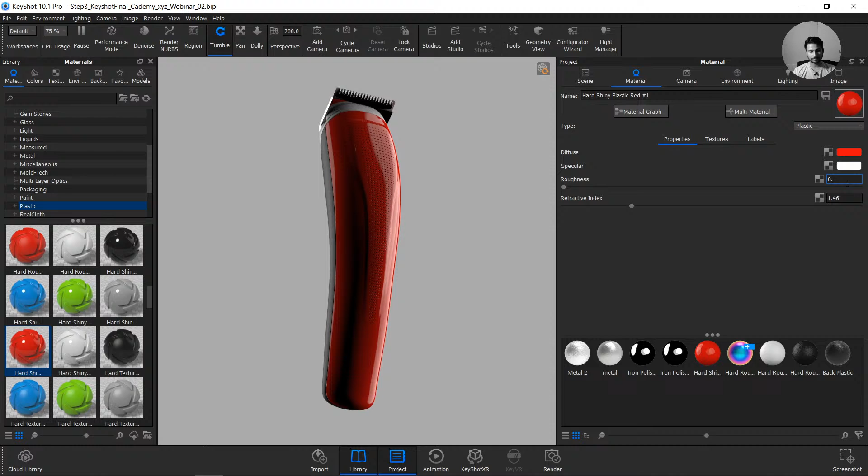These materials in KeyShot are already downloaded, you will find it inside KeyShot library, it's not created by me. So you can set the roughness to a really low amount, and you can see how it creates like this slight matte finish. And of course you can change the color to any other color you want.

All right, so let's try a different configuration of materials. You will also see this cloud library option, and when you click it, it's going to open this cloud library, and you can find a lot of different types of materials directly in the library. Here is a really big list of materials.

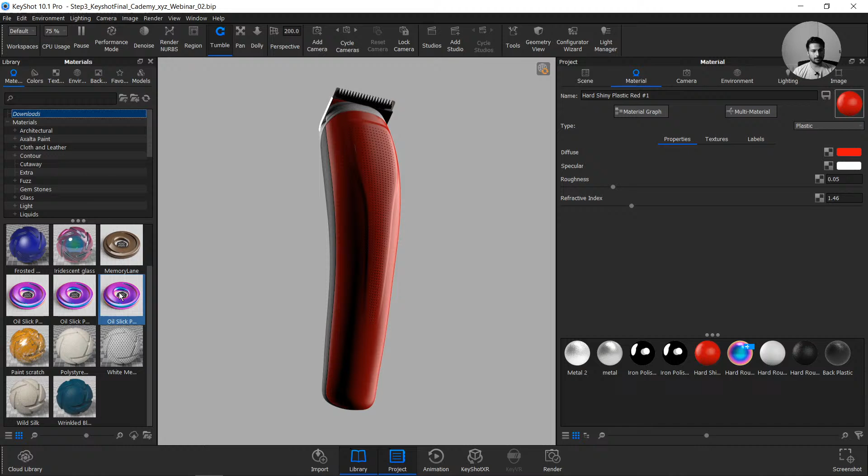Let's try adding this oil slick PVD coating. Let's just download it, and when you press download, it's going to download it in your download material bar, and then you just have to drag and drop this material here. Okay, and you see that material being applied.

So Netik is asking, his KeyShot interface is totally different. If it's totally different, then just click here on workspace, and then click on default, revert, and it should provide you a similar user interface. I'll repeat, workspace, default.

Okay, and here you can change some of the settings. You can change the coating amount, thickness. These are some advanced settings, so don't worry if you're basically starting with KeyShot. And you can change the roughness as well to get different results.

Okay, so what I have done is that I have also included another layer, this bottom one, and you can go to environment and change the environment to the new environment. This is an environment that I have created previously. And you can see we get this nice render.

Okay, and the final step is now to render the geometry. So for rendering this geometry, let's go to render, and it's gonna pop up this render option. So how do you know the settings for rendering this scene?

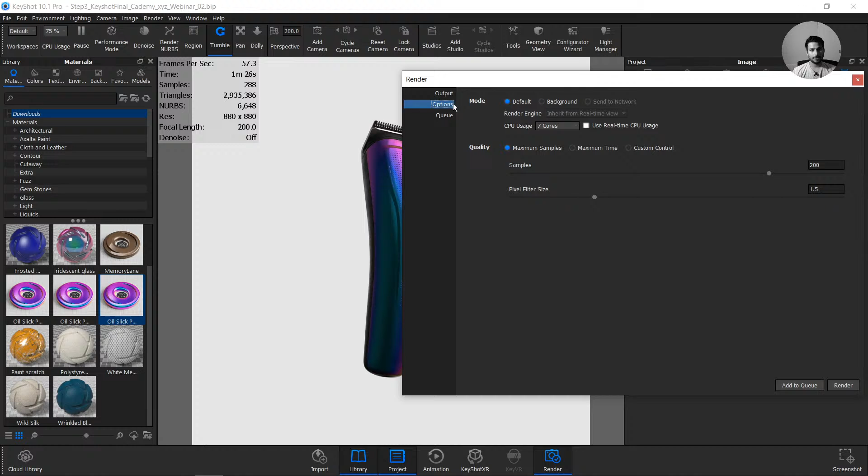So if you press the H button, you can also turn on the heads-up display, H. You will see this window pop up, and on the third line you will see the samples parameter. So whenever I reset my viewport, you will see that the samples start from 1, 2, and they progress. And as they progress, you will get a better render quality. So actually this is the sample number that you have to provide here.

Okay, so you can let it sit for a while. Maybe 10 samples already look pretty nice, but there is some noise over here, so I'm just gonna wait a couple more samples. Maybe you're not able to see it because of screen brightness, but around 40 samples, it's really great. So I'll just bump it up a little bit, I'll set it to 50 samples.

Okay, and once you have set the samples, now you just have to press render. So I'm just gonna press render, and there you go, it's now rendering.

Alright, so this is a really typical workflow on how you can model geometry in Rhino, apply textures in Grasshopper, and then create the render in KeyShot. And you can do some post-production here as well.

What if we provide low samples? Then how does it affect our render time? If you provide a low sample amount, you can see your render will happen a lot faster, but your quality of render will deteriorate. So you can do more settings here, you can increase the exposure, make it warmer or cooler. So these are some post-production adjustments you can do directly in KeyShot.

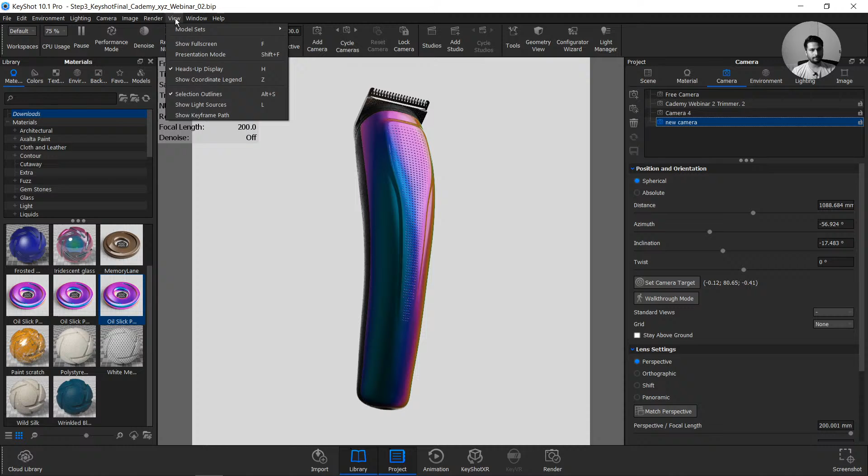How do you decide on the sample? So Eugene, for a sample, as I told you, when you are configuring your scene, you will get this heads-up display. Here you will see this sample number. Whenever you reset your viewport, this sample number will start to calculate one more time. As the sample progresses, your render quality improves. The longer you let it run, the better quality you will get. But there is a law of diminishing return - it's not like if you leave it for longer it will always be better.

There comes a time where that is the best it can do, and the next improvement it does is really insignificant - you won't even be noticing it. So you have to calibrate how many samples it requires, so that when you look at it, it doesn't have any noise or it looks the way you want it to. Here you can see probably like 100 samples is too much. Even at 80, 60 samples it was working pretty well. So I will put that sample amount, 60 or 80, etc, and then press render.

All right, so that's gonna be it. If you have any more questions - how can we emphasize the created parametric pattern in render? Well, you can do that. In Grasshopper, in KeyShot you don't have much control because that's the geometry itself - you have to do that in Grasshopper. You might want to reduce the number of counts, increase their sizes and their depth for the Boolean difference.

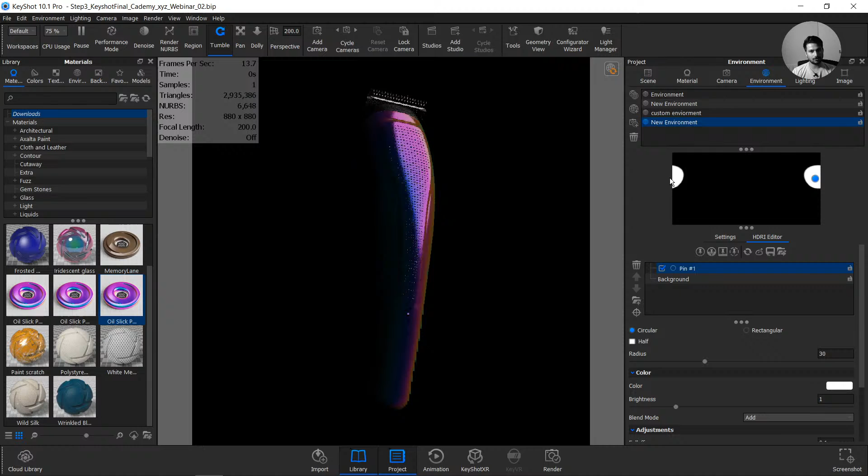There is something you can do in KeyShot though. Let's say you create a new environment - I'm gonna create a really dark environment, create a light source, and I need to position this light source in such a way that it falls just slightly tangent to that surface, so that it looks like the holes are really dark, because you're looking at it from a really sharp angle. That is one way you can emphasize these patterns in KeyShot.

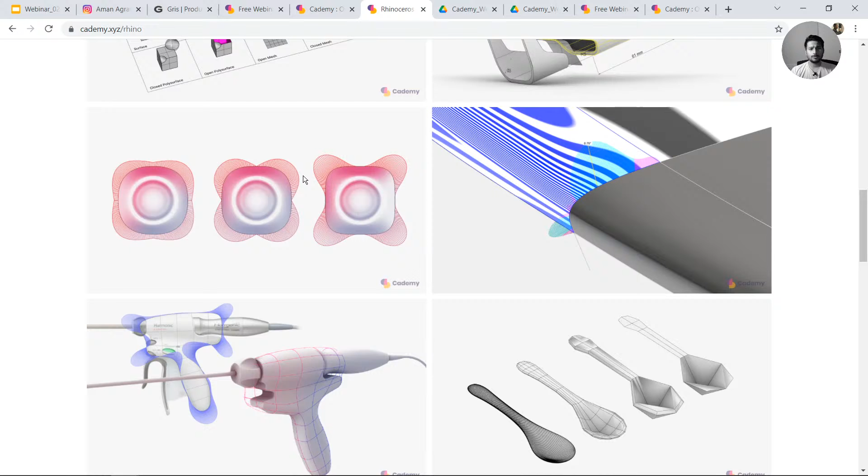But we will also dive deep into working with, like some of you were asking, why not work with degree 5 or degree 7? Yes, that would be the ideal case, so that you don't get this discontinuity on your curvature graph. We'll look at how to match surfaces so that you can create a really nice surface A quality. We will also see how to create geometries with the sub-D workflow or mesh workflow, and some other Rhino tools. If you're interested, you can check it over here. And finally, we have the KeyShot course.

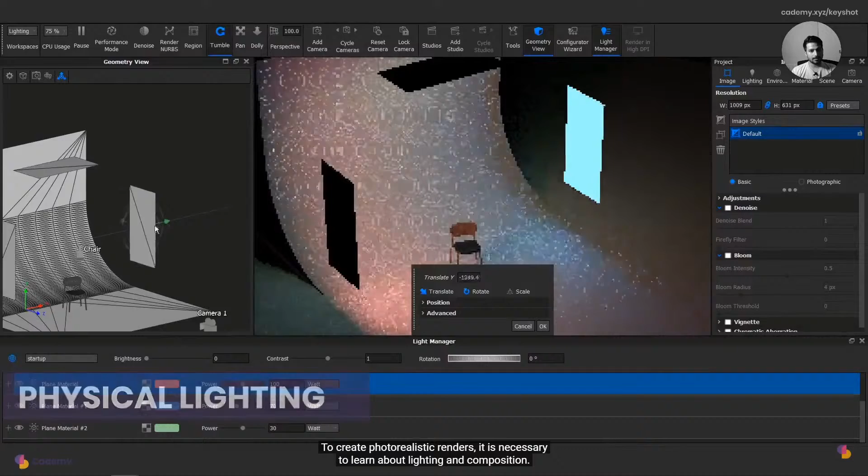We will start with the basic materials, like how you can use pre-downloaded materials from the KeyShot library. We will create our own textures using different PBR material textures and use these utility nodes to modify these textures in a lot more controlled way. We will create lightings, of course physical lightings, so you have physical geometries to create really interesting compositions.

As well as we will go through HDRI, what we were seeing now, like how you can create your own custom HDRI. We will also go through some procedural textures and create algorithmic textures in KeyShot. You don't need any additional texture map that you need to download from the internet to create such textures in KeyShot. Then we will also work with the real cloth node to create photorealistic cloth material, so you can see how these fibers look 3D.

As well as have these flyaway fibers coming out from the cloth. We will also see different geometrical nodes like the fuzz node, some flakes and bubbles nodes, and create this complex multi-layer material in KeyShot, learning how you can stack one material on top of another and create really advanced multi-level materials. We will also look at caustics. You can create these interesting reflections that happen when you pass a light source through glass or liquid material, and how you can get these deformations.

Of course, animation - we will use our OPS concept phone to create nice animation in KeyShot, like parts animation as well as camera animation you can see here. And we will go through some additional important KeyShot 10 updates and utilities that are going to be really helpful to ease up your workflow.

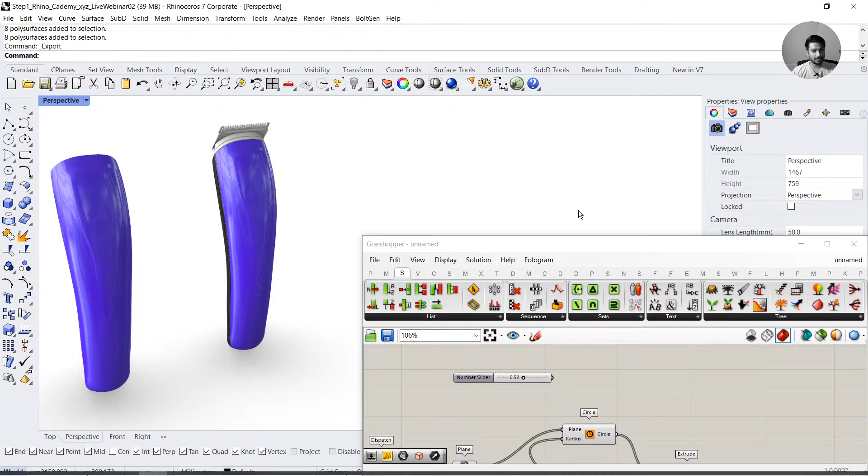Apart from that, can we learn skills of Rhino and Grasshopper from a manufacturing perspective, since we had complaints from the factory or CAD/CAM department? Yes, of course, James. If you can resolve most of the problems internally, you don't have to rely upon external entities. And don't think about Grasshopper as a CAD modeling software - Grasshopper is a lot more like programming itself, and you can create really weird and interesting workflows. This is basically creating a workflow for whatever it is you're trying to achieve. But yes, you can use Rhino as well as Grasshopper for manufacturing and preparing molds.

Then Federico, thank you very much, Aman. Good night. Yes Federico, you should go to sleep - really appreciate you being awake till 4:40 a.m. just for the webinar.

Great webinar, Rob, thank you very much. Yes, it will be available to watch later on, you can just use the same link. Thank you, Sandesh, very interesting. Previous webinars, yes, you can check the resource page. Manuel, gracias. Neha, thank you very much.